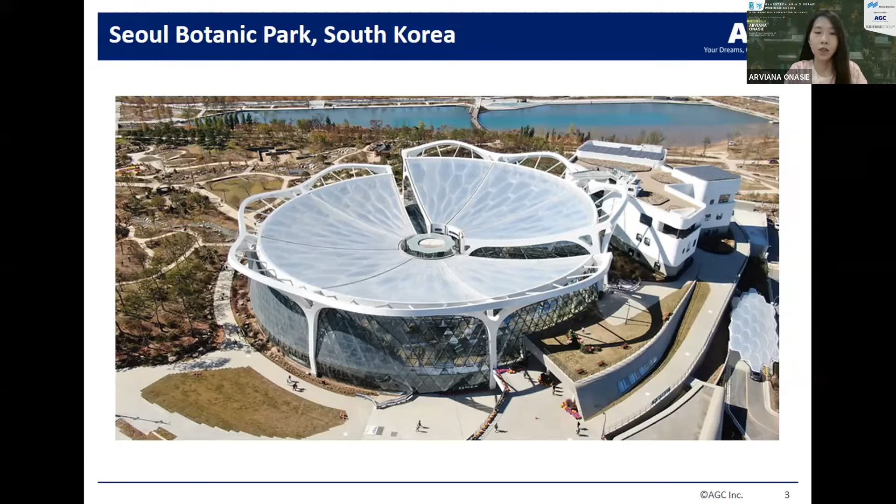So as you can see, it is different from the typical botanical project because the architecture is topped off with a concave roof instead of the outward protruding dome. And as we all know, the limitation of having a concave roof is that for a botanical project, the center and the edge of the building might not receive enough sunlight. So by using ETFE film, it enables this unique concave roof with thin frames to have sufficient sunlight. And that's why the interior is brightly lit as a result.

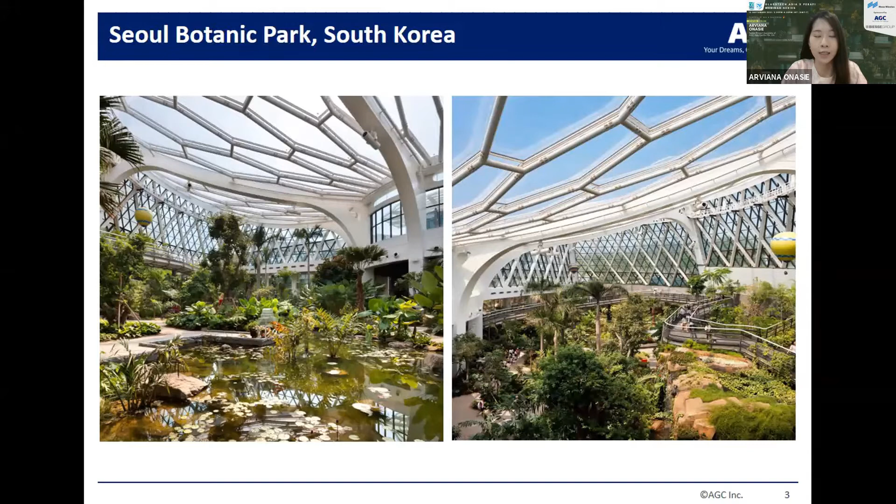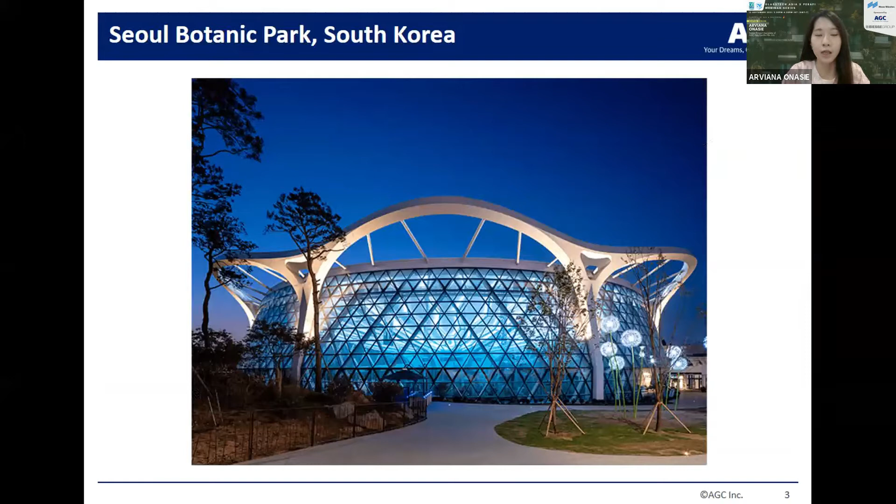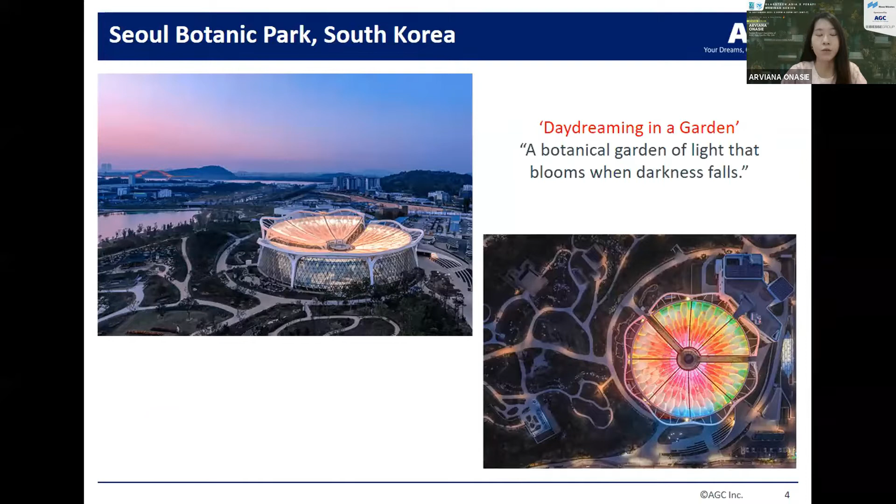So if you can see from this slide, if you stand outside the building itself and the LED lights up, it looks like this. And when viewed from top, it looks like a floral shaped greenhouse. So the lighting concept designed by Eon SLD in Korea was daydreaming in a garden. With portrayal of different lights, the panels come to life at night. And as the film panels are in different shapes and sizes, different scene combinations can be created together with various colors as well as the design patterns. So that's that for the Seoul Botanic Park.

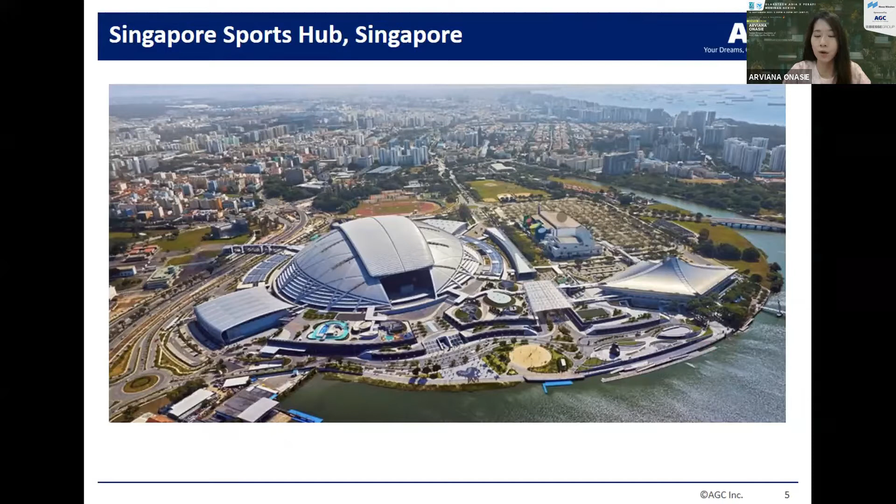So the second one is the Singapore Sports Hub in Singapore. This project was completed in 2014. We all know about this sports hub because of the famous retractable roof. And the roof itself is made of ETFE film, which helps to reduce the overall weight of the roof and the required steel structure. The film selection is carefully considered as this is not only to help with the solar gain reduction, but also to provide shade and to ensure optimal projection and roof illumination at night with the LED lighting itself.

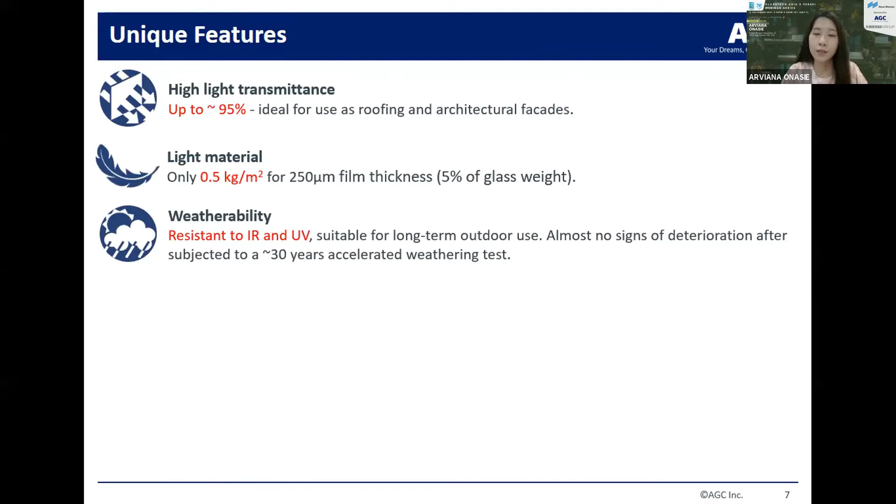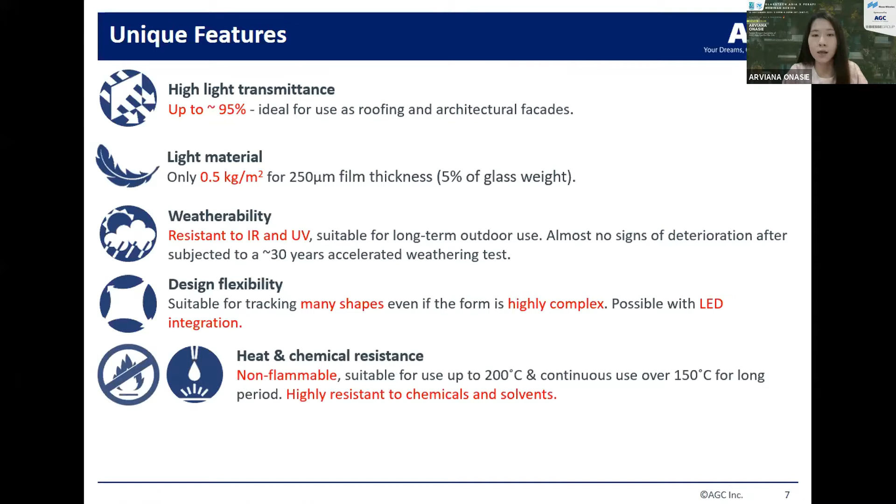The third one is weatherability. The film is resistant to IR and UV. So we do a lab test as well as an on-site weathering test. We do a 30 years accelerated test. After that test, it shows that there is almost no sign of deterioration. And the fourth one is about design flexibility. Based on the 2 project references that I showed you guys earlier on, it can take many shapes, even if the form is highly complex. And it is also possible with LED integration. I will show more project references at a later slide. The fifth one is heat and chemical resistance. The film is non-flammable. It is highly resistant to chemicals such as acids and bases, and solvents. The film also has an anti-stick property.

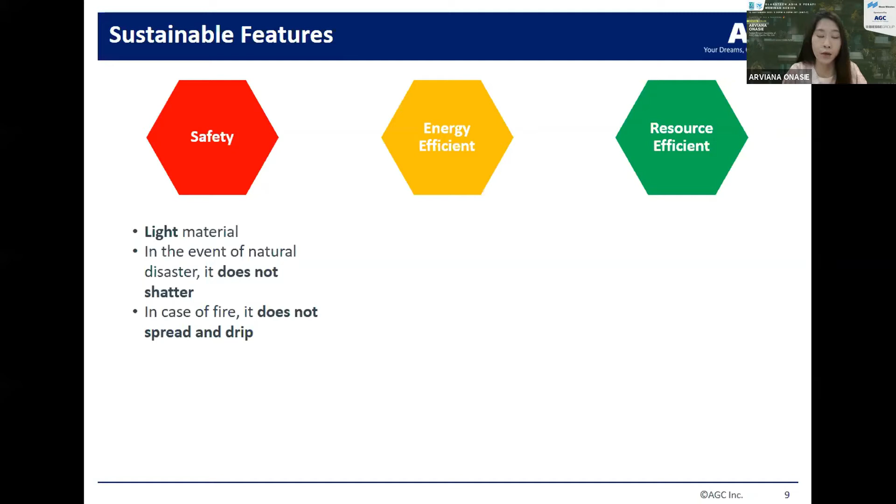As for the sustainable features, we focus on 3 items: safety, energy efficiency, and resource efficiency. So first one, for safety, because the material is very light, in the event of a natural disaster, it will not shatter like glass will. And in case of fire, it does not spread and drip. The second one is about energy efficiency. As I mentioned, it is transparent and has high VLT. So it encourages natural lighting to be implemented in the design, which means that it can reduce the electric lighting usage as well as the cooling load, which will give you an optimum indoor environment.

And the last one is resource efficient. Okay, so the last one is resource efficient. Since the material is very light, we don't need a lot of primary steel structure to support the material. So we can save about 30 to 50% of the structural support. It also requires lesser manpower for installation, and the installation time itself is very fast, so it's very short.

It also requires lesser material and electrical costs, and that is because the film itself already reduces the electric lighting usage. That's why the electric cost is lower. And since the film has an anti-stick property, this material is a very low maintenance material. So in terms of cleaning or maintenance, about once or twice per year will do. So because of all of this, it gives you an overall cost saving. Fluon is also a green material whereby it is 100% recyclable.

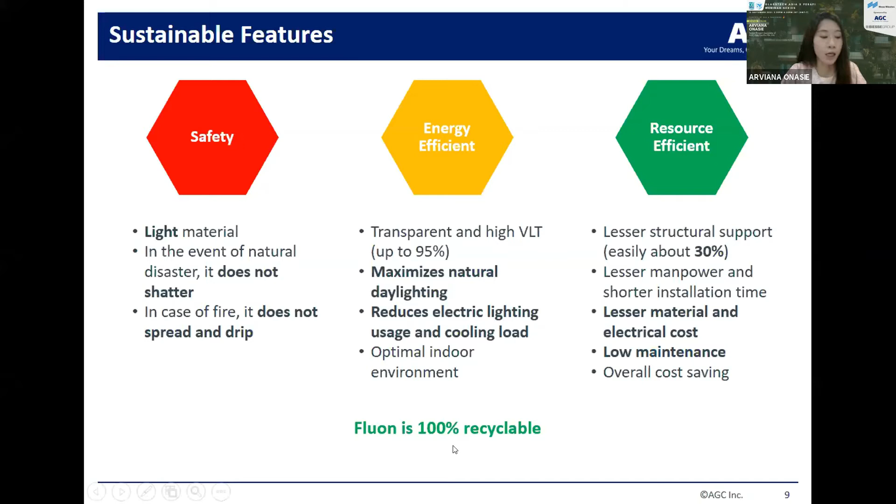Right, so this is a table comparison between a new and a 27-year-old exposed film. So in terms of VLT, there is not much change, just about 0.2% difference. And mechanical-wise, even after it is cleaned, also less than 2% difference as compared to the new one.

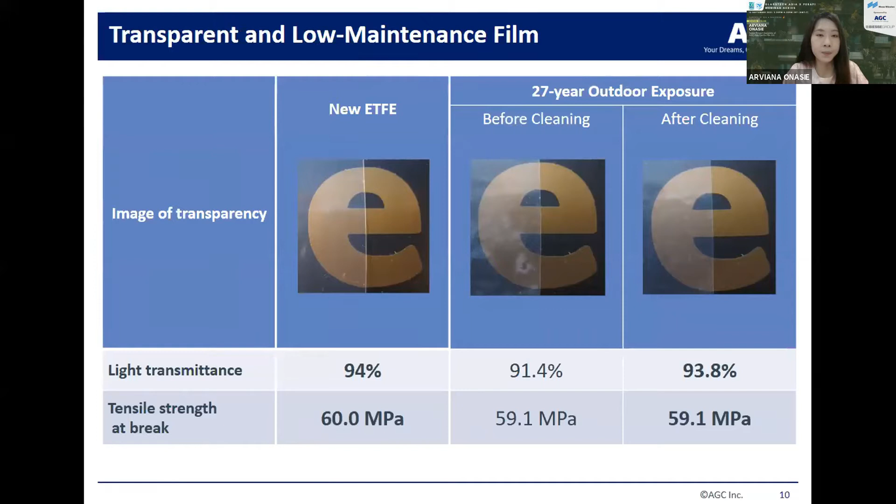Customizable. So depending on your design requirement, ETFE film can be customized in terms of film combinations such as number of layers, colors, print, shapes, and sizes. So here is one of our project references in China, the Water Cube in Beijing. We can see that each panel has different shapes and sizes. So the project uses about 300,000 square meters of Fluon ETFE film with more than 200 unique shapes. I was also informed that there are no 2 panels with the same sizing.

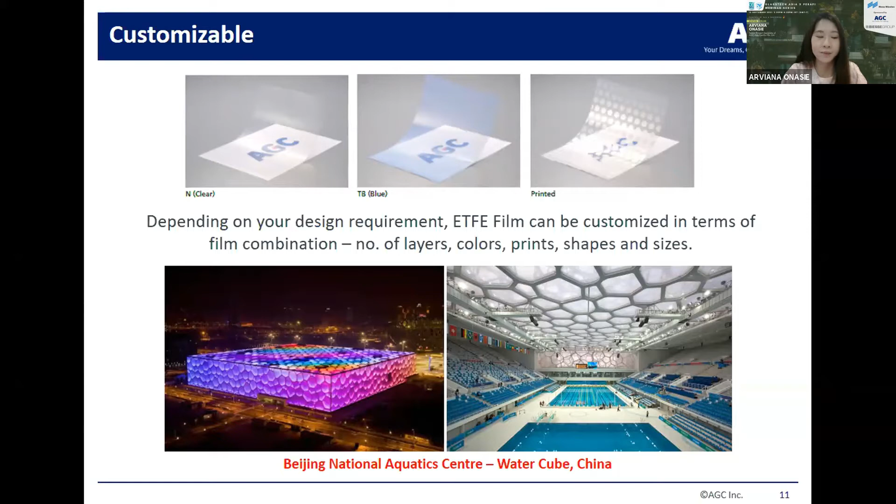Apart from the design aesthetic, design requirements also include optical and thermal performance, such as VLT, SC value, and U value. So from here, we can decide on the film configuration. ETFE film can be used as a single layer or a multi-layer system. So for a simplified comparison with glass, the number of layers can be loosely compared to single, double, and triple glazing units. In fact, ETFE film systems are very similar in performance to glazing units and are serving as an alternate option for this system.

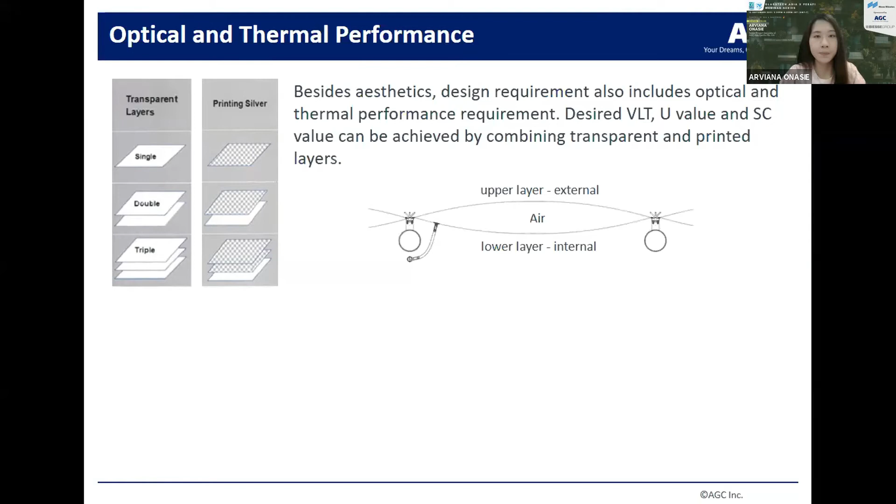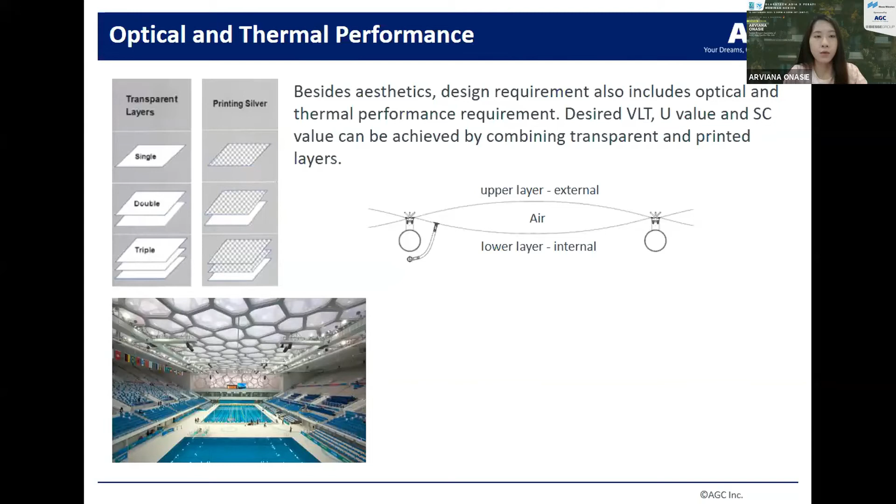In the case of the Water Cube in Beijing, ETFE panels are designed to ensure the venue is well lit during the day with appropriate levels of internal daylight, visual connection, and visual comfort. And in Southeast Asia, the typical spec for ETFE film is usually 2 layers, with the upper layer printed and then a transparent lower layer.

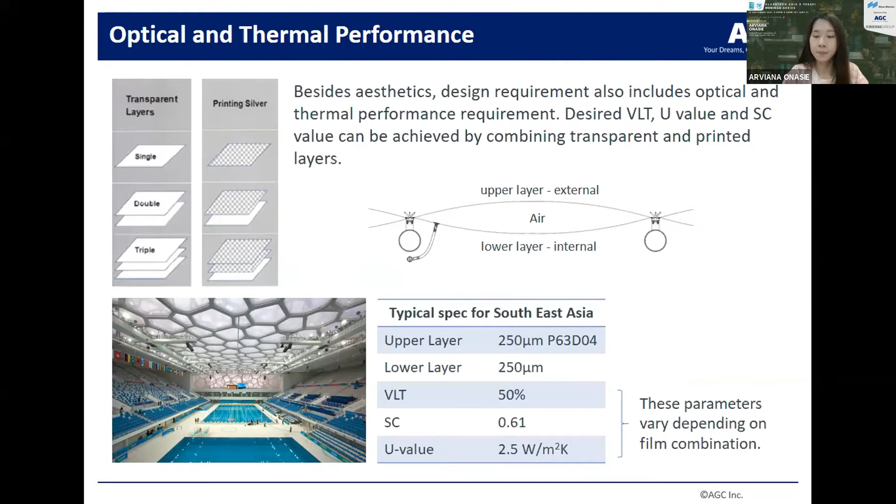As for safety performance, many people think that since it is lightweight, the structure will easily fail. But the answer is no. ETFE film cushion has high load bearing capacity and has strong structural integrity when it is installed correctly. So don't worry, the panels will not fly out of the frame during a typhoon. We do have Philippines projects whereby the wind speed is about 300 km/h. So therefore, with careful calculation and spec selection, safety is ensured.

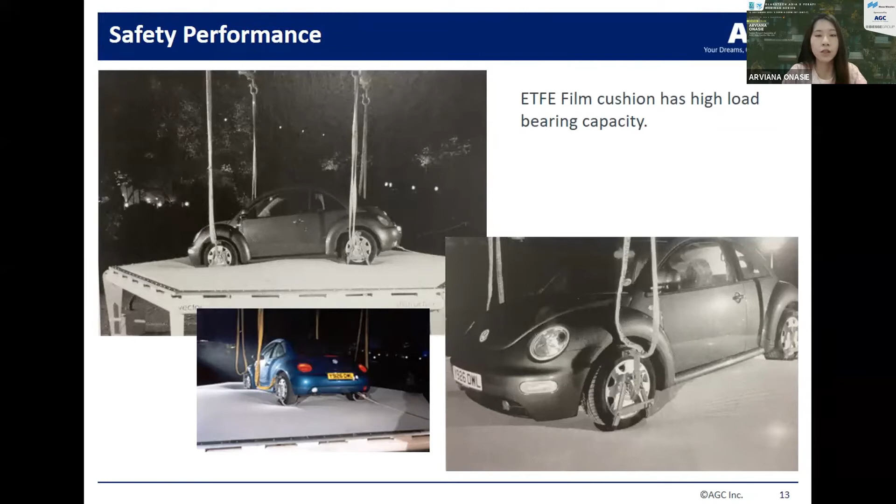There is always a concern for how the material will behave in the event of fire. So ETFE has been rated as self-extinguishing with no melting or dripping of burning material. So when exposed to direct flame, ETFE film will crumple, shrink, and disintegrate if it is exposed long enough. So it just vents the fire to the atmosphere. The film has passed International Fire Safety Standards and is rated Class B S1D0, which means its smoke production is very limited and it does not produce flaming droplets.

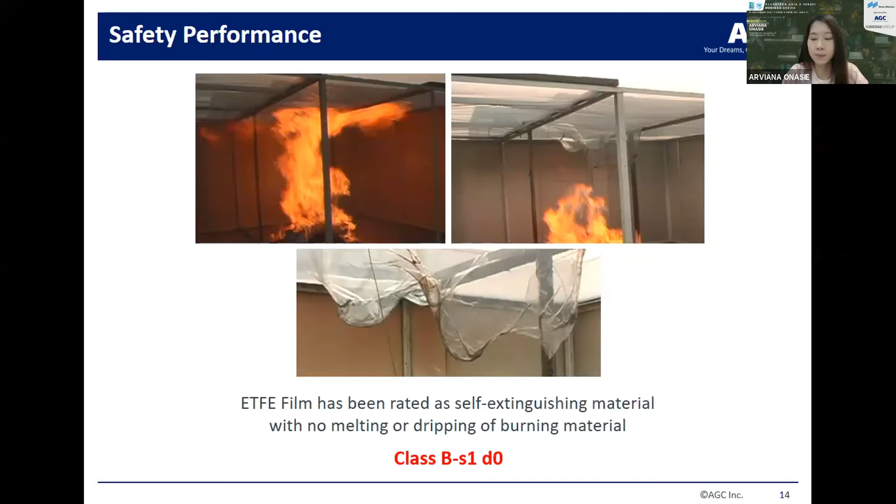Okay, so for the cushion system, how does it work? This is a cross-sectional view of the ETFE cushion system. So the film layers, 2 layers in this case, are restrained in aluminum extrusion and supported by the steel structure. The cushion is then inflated by connecting it to the air inflation unit by an air tube. The pressurized air in between the layers serves to stabilize the film and provide structural performance in addition to the thermal performance of the system.

So one air inflation unit, just the size of like a cabin baggage, can cover about 1,000 to 1,500 square meters according to the film curvature.

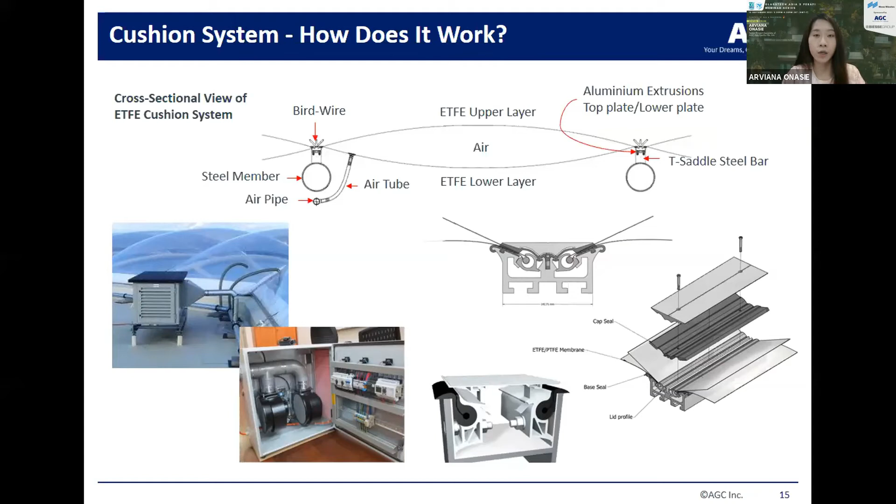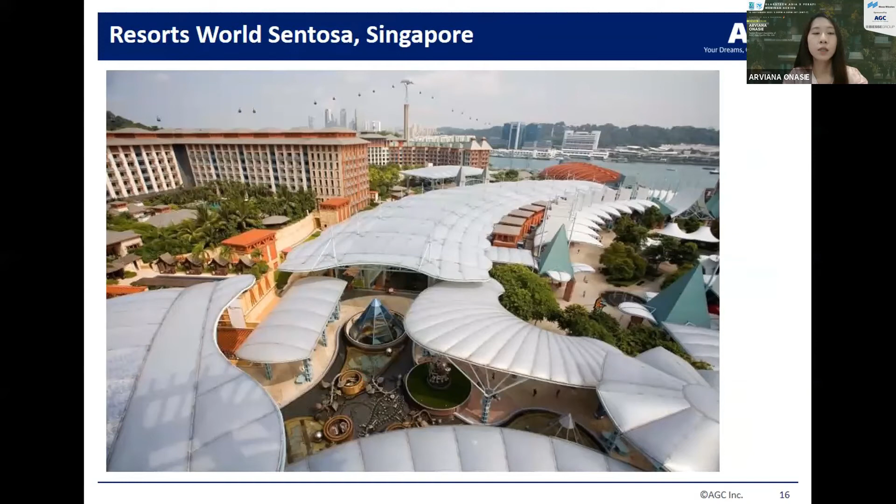So now I will move on to the project references so that it's easier for you to visualize how ETFE film can be applied. So the first one is Resorts World Sentosa in Singapore. ETFE film covers a wide area of RWS. We can see here that the area looks airy and spacious, and this is because there is no main structure built in the middle of the area to support the material. All supporting structures are built at the sides, just on top of the existing building structures.

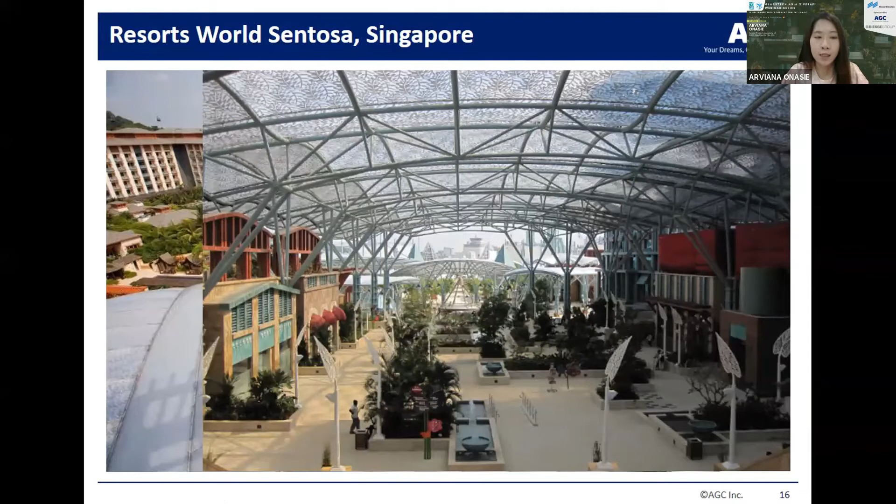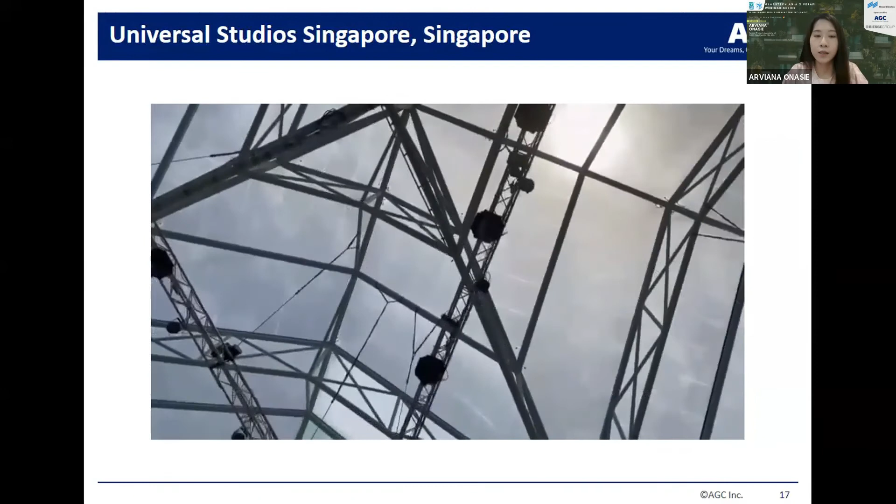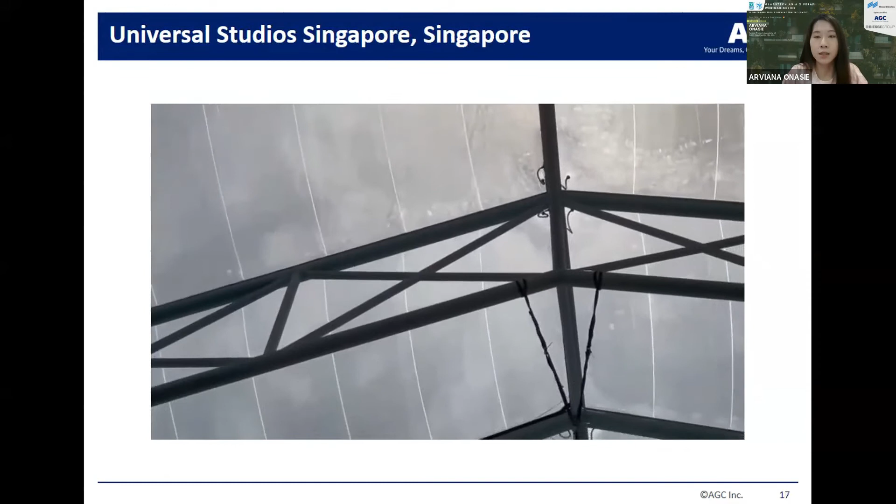And the pattern printed on the film is a customized one. It was designed to adjust the thermal comfort level. And not only RWS, but it also extends to Universal Studios Singapore. This is located at the New York theme zone, just outside the replica of the New York Public Library. So as you can see, it is not glaring. The optical performance is still at a comfortable level during midday. So this video is actually taken at about 12:30 p.m.

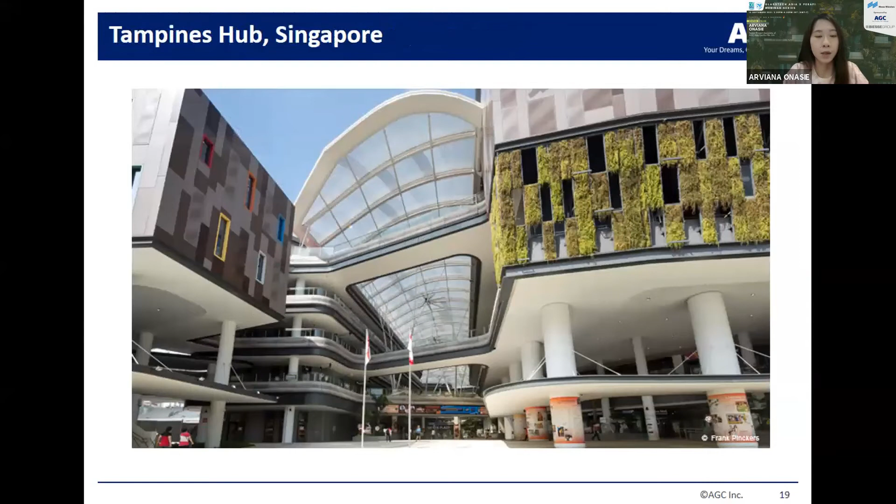Next one is Tampines Hub in Singapore. We can see that there are large column-free spaces. And if you notice from the skylight, I hope you can see my cursor. So the skylight has a different panel combination according to the architect's design intent. So the different panel combination gives you a sky effect. So when you are at the shopping mall indoors, when you look up, it looks like sky.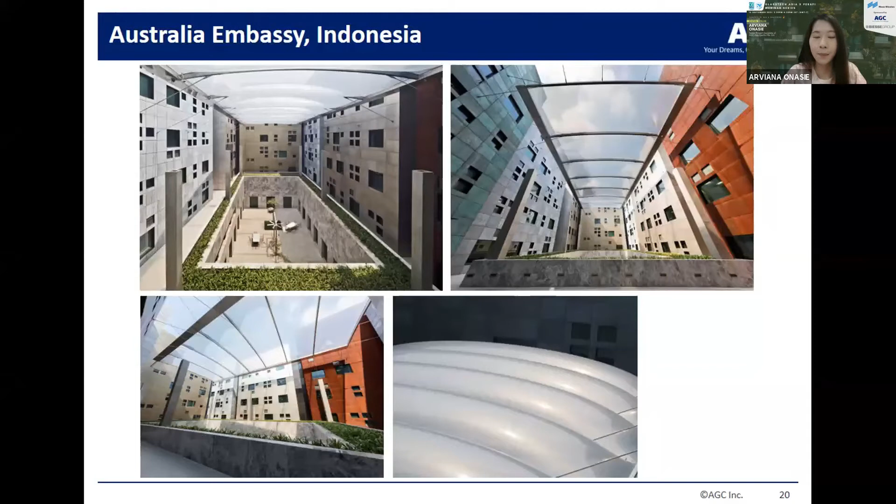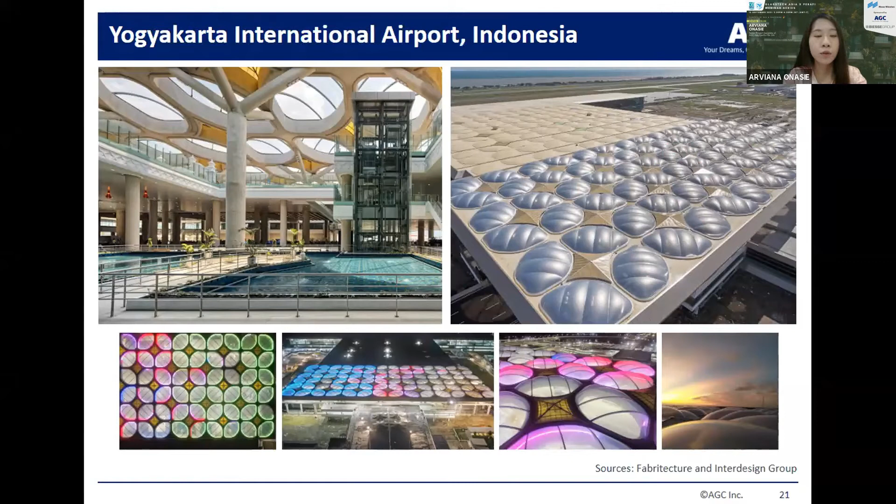Next one, this is our latest project in Indonesia, just completed early last year. So Yogyakarta International Airport is the first Indonesian airport with Greenship certification by Green Building Council Indonesia. So the drop-off area uses a 2-layer ETFE film system, which gives you excellent optical and thermal control and shows a nice LED display at night.

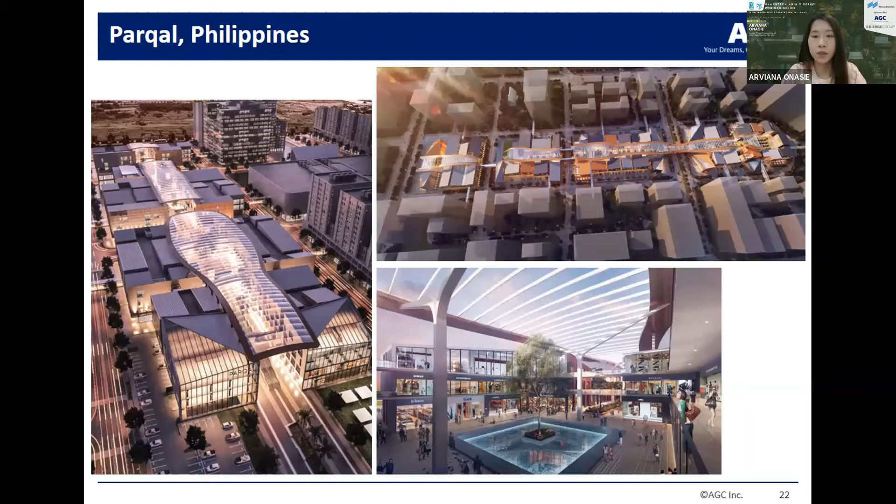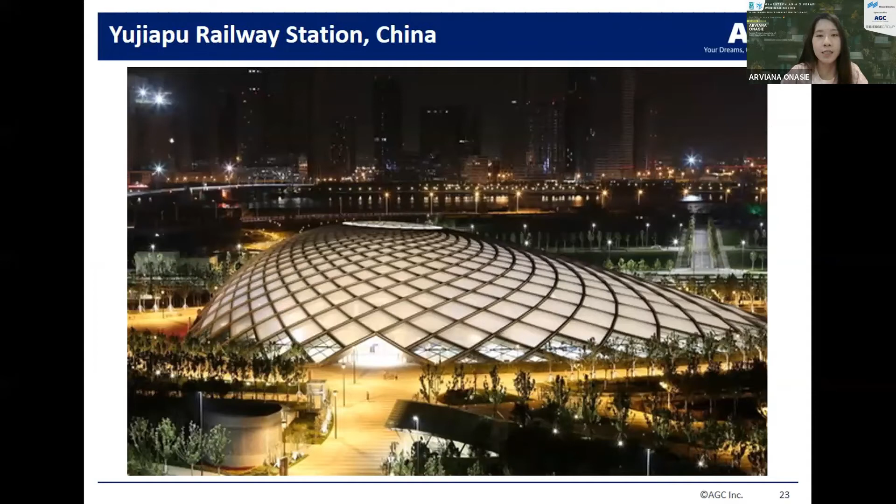Next one is Parqal in the Philippines. This is one of our ongoing projects for a walkway canopy in between 2 main buildings. So this is very straightforward. Next one is Yujiapu railway station in China. This project is rather unique, nice looking exterior design and very spacious interior. So natural lighting can also come in. At the outside, this is the close-up picture of the individual panels. And there is also a water gutter to prevent any leakage. So this is basically just the design intent.

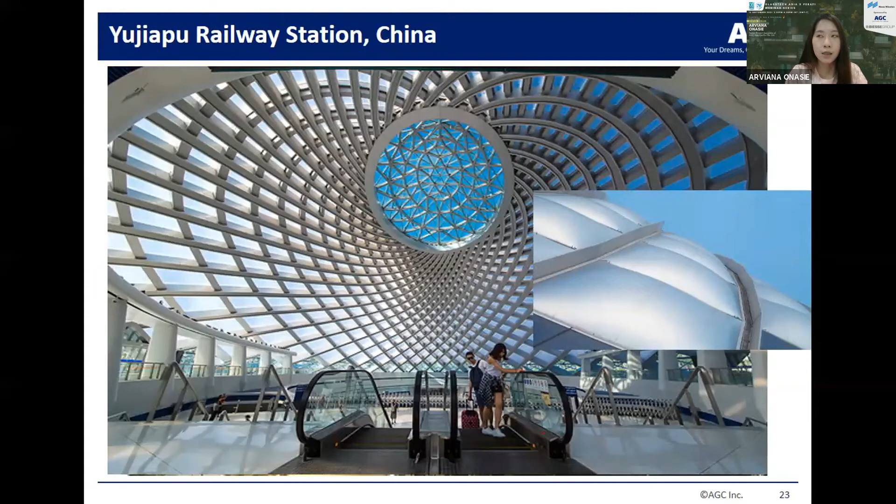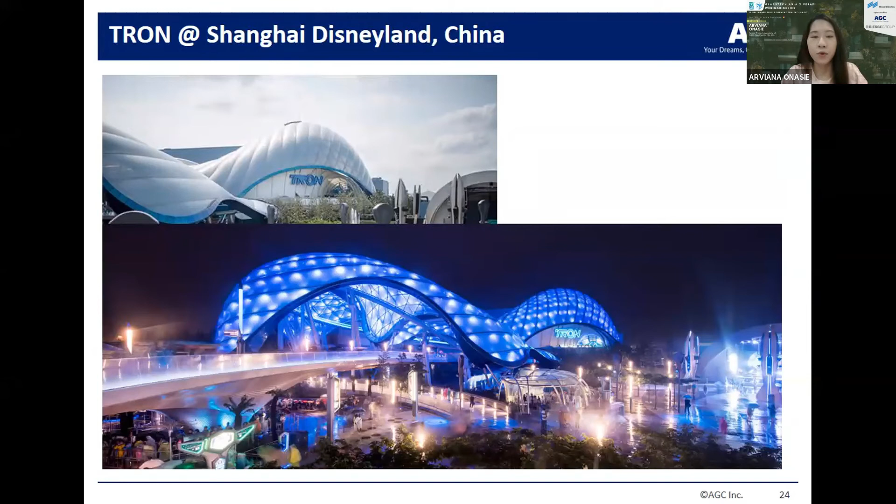Next one is Tron at Shanghai Disneyland, China. This attraction is the main piece of Tomorrowland Park. So it has gained much attention due to the nature of the ride, it's like a roller coaster, as well as the architectural design. So I would say that the curved wave, color changing lightweight canopy suits the theme itself. If I'm not wrong, the theme is something like a magical kingdom. So it brings a different ride experience, and it is extremely beautiful internally as well as at night because of the LED display.

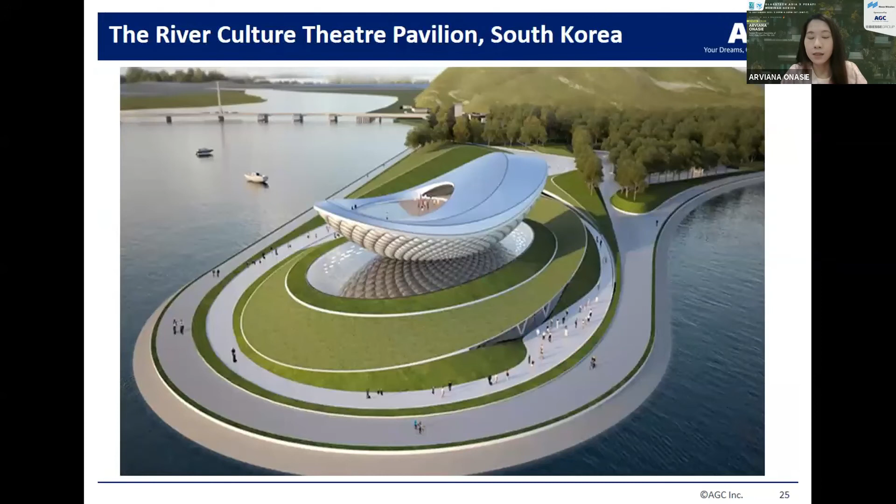The next one is the River Culture Theatre Pavilion in South Korea. This project has a bowl-shaped structure cladded in ETFE cushions. So it gives a quilted texture and silvery color to the exterior walls.

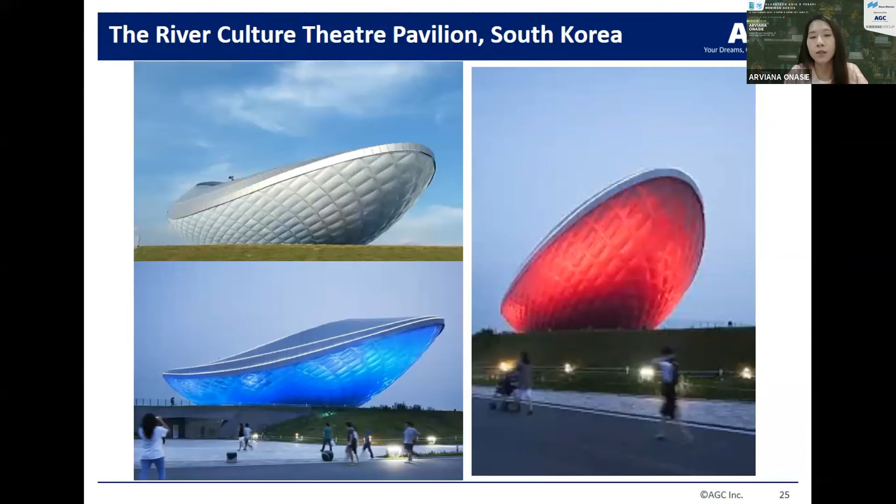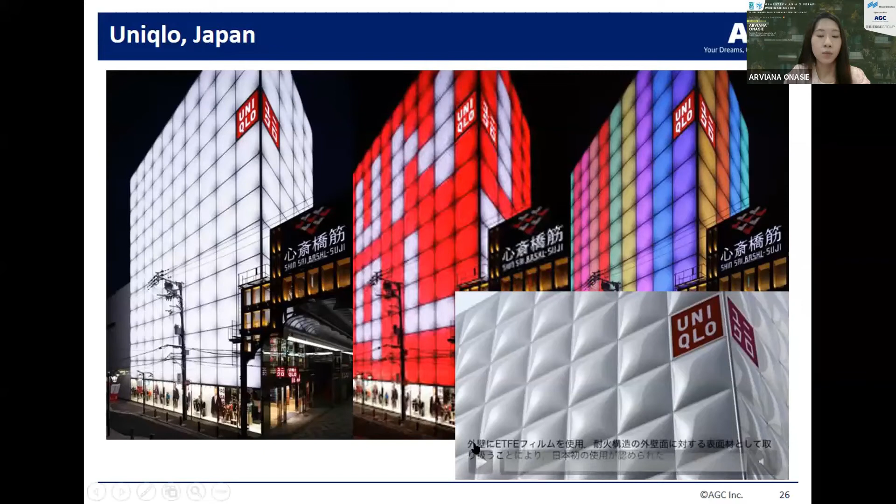Uniqlo Japan. Okay, Uniqlo Japan is actually a renovation project whereby ETFE film is installed as a double screen canopy. So it is built on top of the existing structure. So I'll play a video. As you can see, the lighting can be programmed and played accordingly. So if you visit Osaka next time, after the travel ban is lifted, you should visit Shinsaibashi. It is a very popular tourist spot, and you definitely wouldn't miss this Uniqlo due to its lively facade at night.

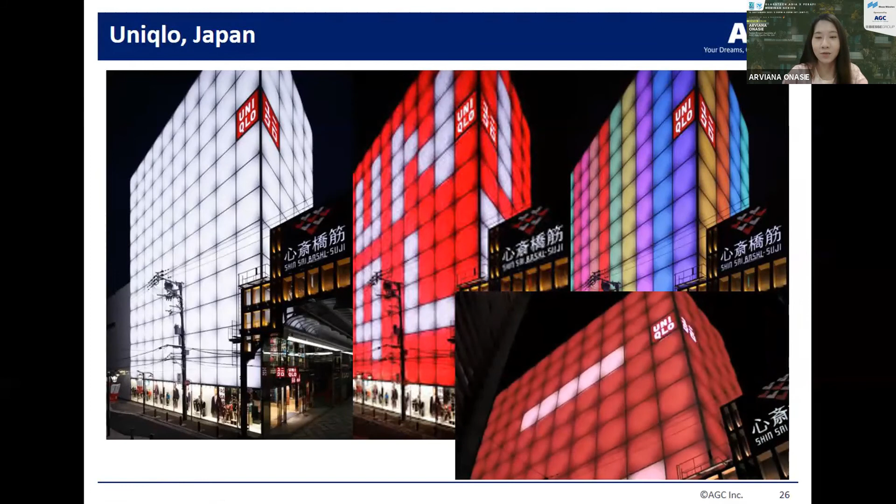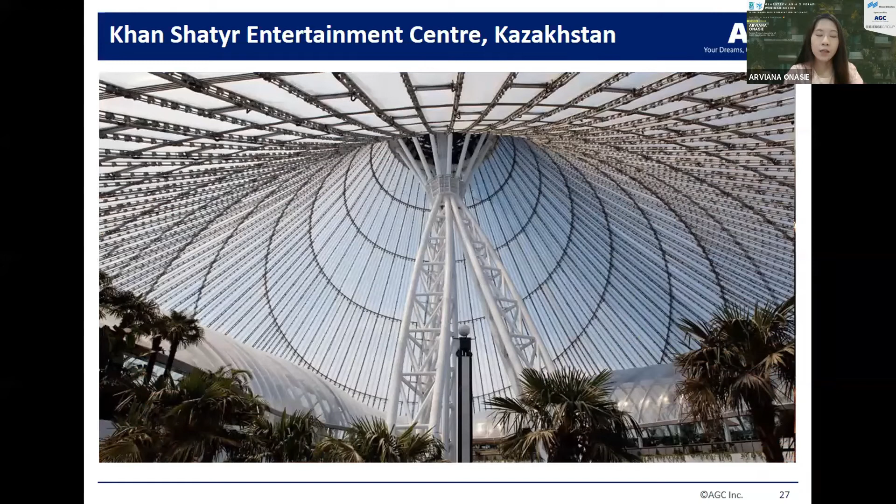Okay, next one is Entertainment Center in Kazakhstan. This center opened in 2010, and this project is the world's tallest tensile structure at 150 meters. And since the material is very light, it just needs one three-leg main primary structure. And LED is also part of the design to light up the facade at night.

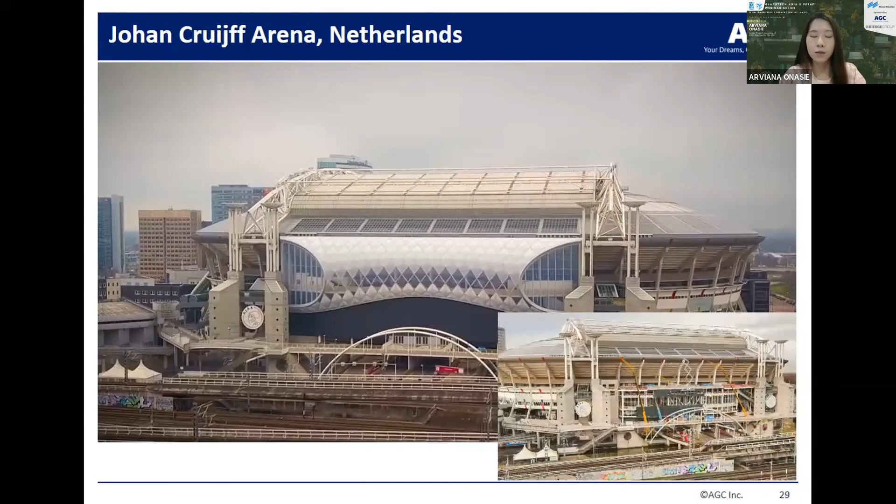Right, the next one is an arena in the Netherlands. So these are short clips to show how the construction goes, from the framing to the film installation itself. So you can see very minimal manpower. If I can go back. Yeah, so it shows that maybe it's just 3 or 4 people to install the panels, and the installation itself is very fast to complete.

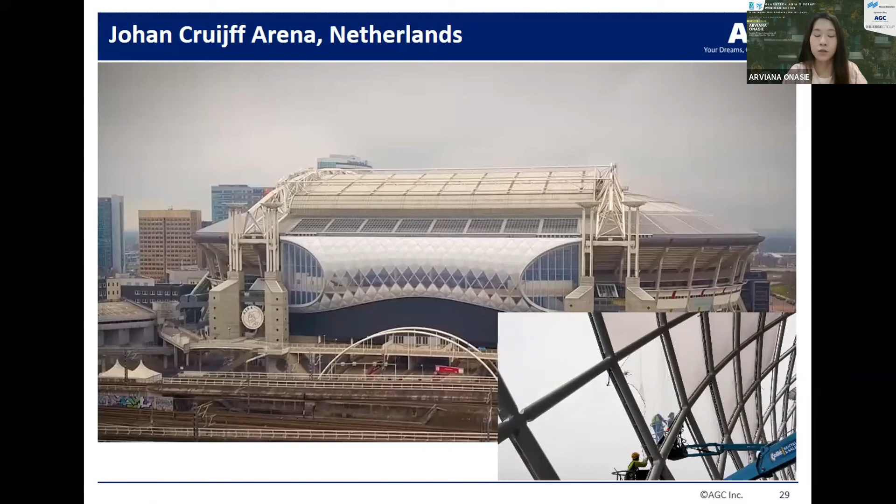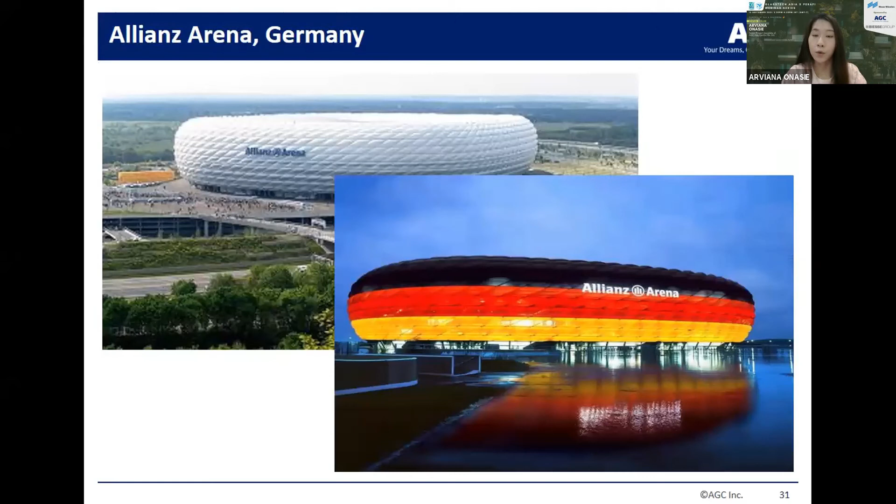Okay, so why AGC Fluon ETFE Film? Firstly, because we have a large production base. We produce our own ETFE resin in Japan and UK. So we are #1 in terms of ETFE resin as well as film capacity. We also have technical support, and we provide a strong supply chain in the region. Secondly is excellent performance. So we have thicker films and UV cut grade. UV cut grade is normally meant for greenhouse projects, so it's not really for architectural projects.

And then for the durable print, we use our in-house Lumiflon FEVE. It is better ink for printing, does not delaminate, and it has better adhesion. And as I mentioned during the sustainable features just now, ETFE film is a green material whereby it is 100% recyclable.

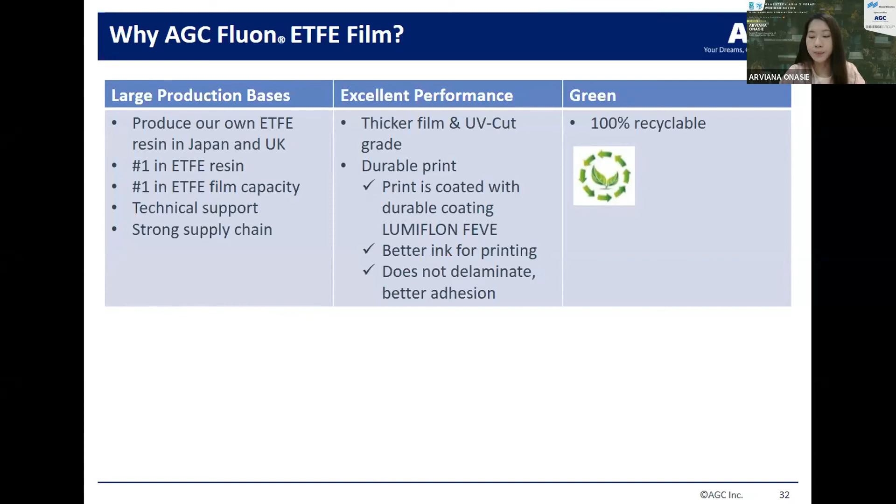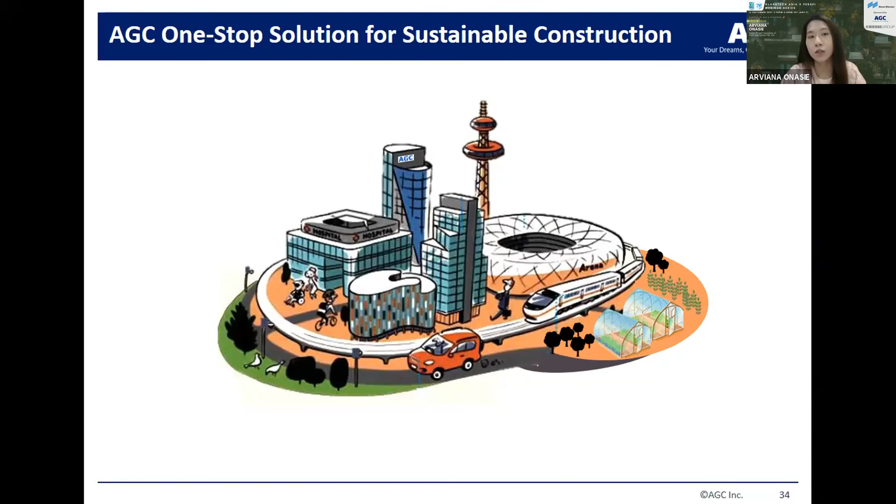Right, so I would like to spend a wee bit of time on this slide. So other than Fluon ETFE film, here is our one-stop solution for sustainable building and construction. I understand that many people think that AGC is a glass company. Yes, we started as a glass company, but we have expanded to electronics, chemicals, and ceramics divisions. So in fact, Fluon ETFE film comes from the chemicals division. So firstly, I would like to mention our high performance glass. They are all regionally manufactured in Indonesia with Asahimas, and in Thailand with AGC Flat Glass Thailand.

So I'm sure most of you are very familiar with our glass product names, such as Stopray, Sunergy, T-Sunlux, Stopsol, Planibel G, etc. The next one is Smart Glass. Smart Glass is still carried by the Singapore office. It is named Glassiled, which is a double glazing unit with LED between the two panes, embedded in the airspace. Yes. And then the third one, we have special glass.

So we have anti-reflective glass, Clearsight. It has a very high VLT and is low iron glass. And then fire rated glass, Pyrobel, with fire rating classes ranging from 30 minutes to 2 hours. And we have security glass such as bulletproof, anti-theft, anti-explosion, named Stratobel. The one that is currently hyped up is energy creating facade glass, our building integrated photovoltaic Sunewat. And lastly, coming from the glass division is our interior and mirror.

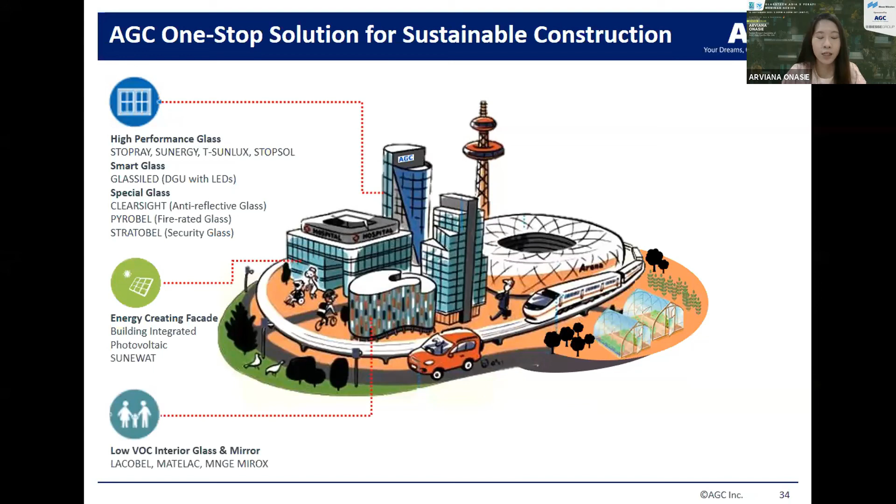So from the chemicals division, we have durable coating resin, which I mentioned to coat the printed films. It is called Lumiflon FEVE. It can be used for different kinds of substrates such as aluminum frame, solid aluminum, ACP, CFC, and it can also be applied for heavy duty applications. This coating resin has at least a 30 years warranty. And secondly, there is high performance fluoropolymer film, ETFE film, which we just discussed in depth. However, today I only mentioned the architectural part. But in fact, ETFE film can also be used in greenhouse projects under the name of F-Clean.

And lastly, we also offer clean and durable sealant resin called Excestar. It is also well known as a modified silicone. So other than clean and durable, we also provide a colored sealant for color matching purposes. So for example, if your ACP is blue in color, we can provide a blue colored sealant without it being painted. And of course, this sealant can be painted as well.